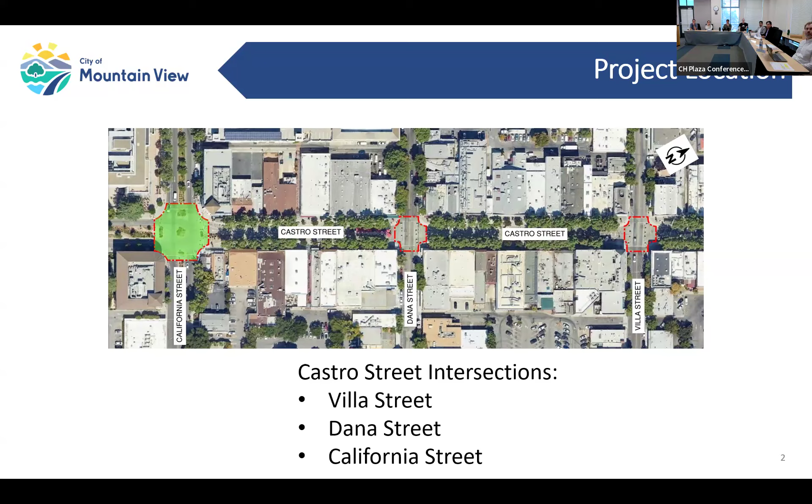So, which Castro intersections are included in this project? The aerial photo shown here illustrates the project location and the three intersections proposed to receive improvements: Villa Street, Dana Street, and California Street. But before we dive into what those improvements are, here's a little project background.

In 2020, as a result of the COVID-19 pandemic, Castro Street between Evelyn Avenue and California Street was closed to vehicular traffic to allow outdoor dining to support local businesses. In 2022, the mayor approved the formation of a council ad hoc committee to review and provide direction for the design guidelines and implementation plan for an interim pedestrian mall along Castro Street.

Later that year, the City Council introduced and adopted an ordinance for establishing a pedestrian mall on Castro Street. In 2023, the ad hoc committee recommended that council approve a modified signal control at the Villa and Dana Street intersections. Council also approved the ad hoc committee's recommendation for a single central pedestrian crossing. And finally, last year, City Council authorized a professional services agreement with Kimley Horn for design services and construction support.

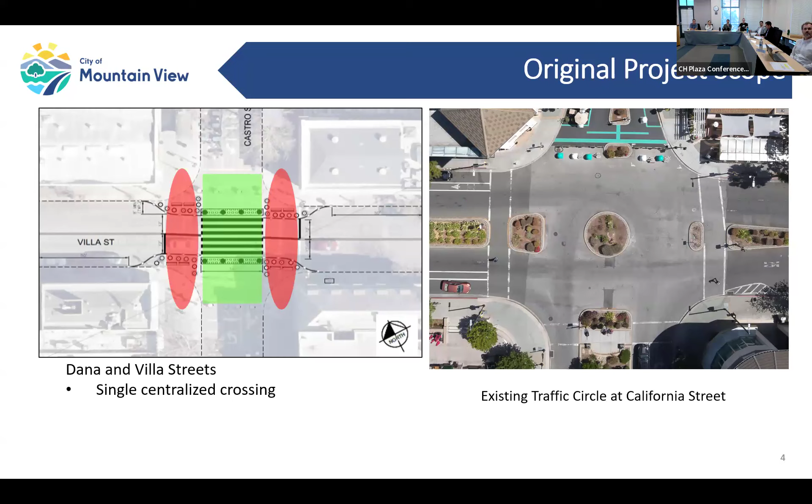At this council meeting, a design concept for Villa and Dana Streets was presented to council and is shown here on the left side. This design includes removing the two north-south crossings and replacing them with a single central crossing in the middle of Castro Street.

Installing new traffic signal equipment, modifying street curbs to shorten the pedestrian crossing distance, and installing new bollards and fencing to guide pedestrians towards the central crossing. On the right side is an aerial of California Street where we are planning to convert the existing traffic circle into a modern roundabout.

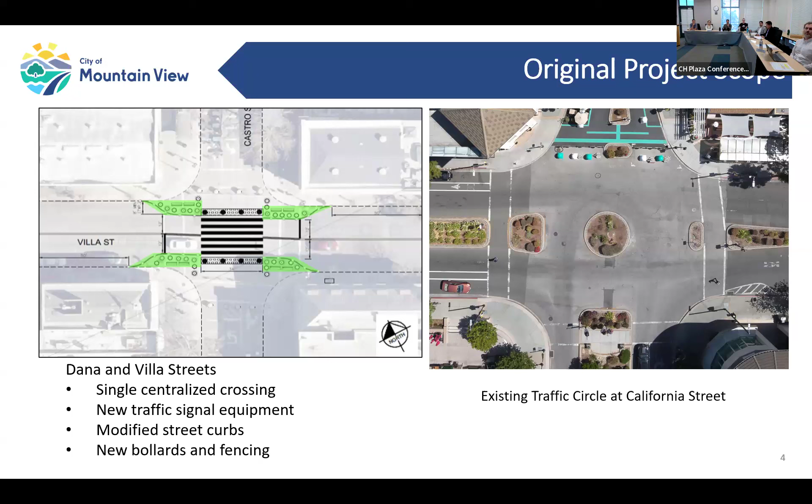Due to limitations in funding and to not delay construction of improvements at Villa and Dana Streets, the project will be constructed in two phases. Phase 1 will include the design and bid package for the Villa and Dana Street intersections. Phase 2, which will follow Phase 1, will include the design and bid package of the California Street intersection. At the moment, only the phase one concept is being developed.

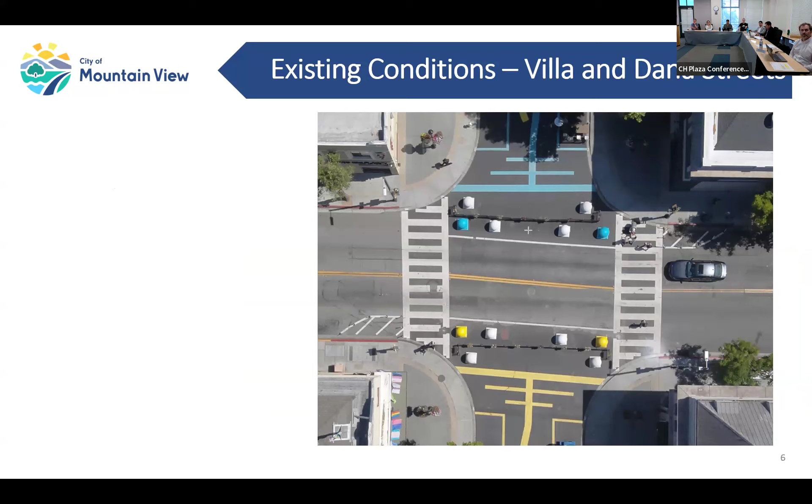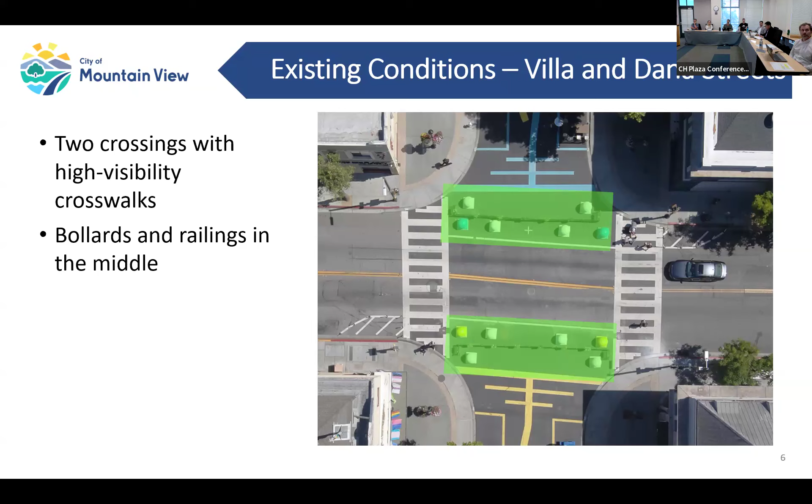This aerial shows the existing conditions at Villa Street, which are similar to conditions on Dana Street. We currently have two crossings which do not allow pedestrians to continue along the center of the street, bollards and railings, and outdated traffic signal equipment that require replacement to accommodate a center crossing.

This next slide shows the proposed improvements at Villa Street, which also applies to Dana Street. The proposed design will include the following elements: pedestrian crossings that align with the existing sidewalks along Castro Street, a central street crossing that includes a 21-foot wide opening that lines up with the recently installed ribbons along the pedestrian walkway.

Removable bollards to provide access to emergency vehicles, reusing the existing colorful round bollards, bulb outs to shorten pedestrian crossing distances. Existing decorative fencing will also be reused to provide a consistent pedestrian mall treatment. New traffic signals and pedestrian push buttons. New uniform thermoplastic crosswalk treatment that extends the entire width of the street, and refreshed striping.

So here are our next steps. We will present the design and BPAC's recommendation to CTC later this year. We anticipate phase one's design to be completed by summer 2026. Construction is not yet funded, but we expect it to be funded by the time design is completed to allow construction to start in fall 2026. We expect phase two design to begin in 2026 once construction funding for phase one is secured.

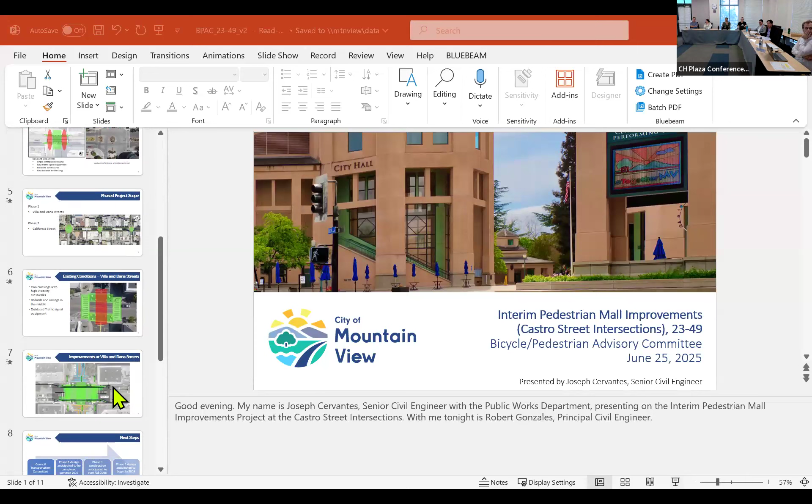I guess the reason I ask is because I vaguely remember hearing something about pedestrian sensors that could detect if somebody's waiting there rather than push buttons, or am I misremembering that? I would defer to our traffic group, so we can get you that answer.

I know that there are certain intersections in the city where we're moving to cameras. I don't know if those cameras are good at detecting either cyclists or pedestrians depending on where they're standing. They're designed to see vehicles in the lanes. So I don't think this intersection is proposed to be equipped with cameras.

We do have push buttons there that have the wave function.

Is it going to prevent any children from misunderstanding that the middle is kind of open for them to cross through with a system like this?

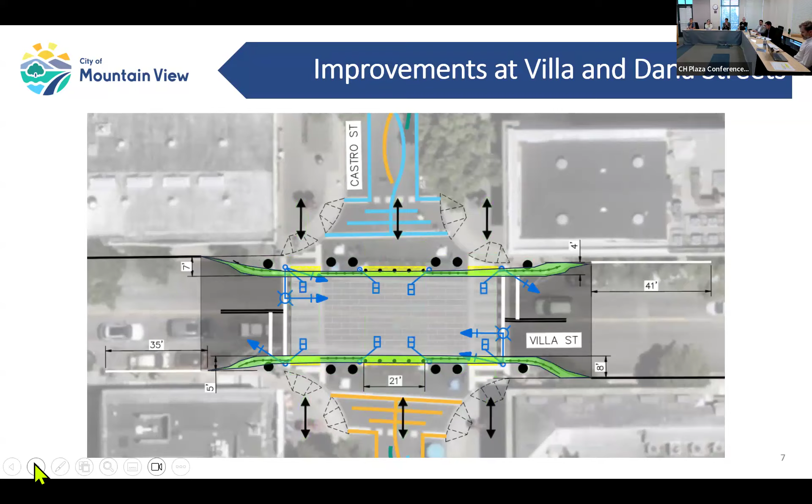That's good to hear. With that, I think we need to figure out, can we go to whatever slide has the action we're being asked to take to approve things or not? I have to ultimately find that. Okay, this one?

My impression of the feedback people have been giving is that broadly speaking we're happy with the layouts, and there are some things we'd like to see. Some comments were potentially a step to do at the same time, but from what I'm hearing from staff, it would be reasonable to revisit once we have the layouts in place—things around signal timing, posted speed limits, and speed humps. I'm not sure if I should include those in a motion or not. Would that be helpful to staff, or should we do a clean motion and have those be separate?

I'm okay either way, so I agree those are the notes I got: reduce speed, signal timing, and the speed humps—consider the speed humps. Staff has all three of those and will present them as concerns or comments back from BPAC to CTC, but you can certainly include it in your recommendation.

Do members of the committee have strong thoughts? Otherwise I'll just make a motion—whatever is easier to convey to CTC, I guess.

I'll move that we recommend the CTC approve the concept intersection layouts for the interim pedestrian mall improvements, with the recommendation that the city revisit or look at signal timing, posted speed limits, and potential installation of speed humps once the project is implemented.

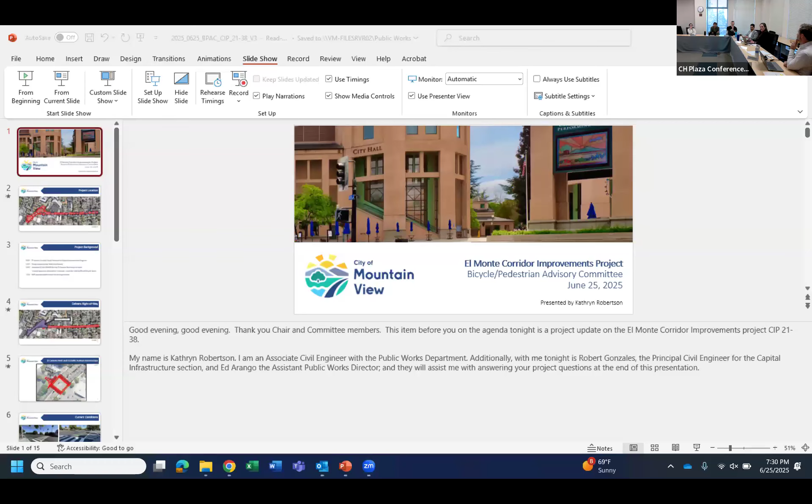Sounds great. All right, ready? Yeah, okay, members ready? All right, good evening. Good evening.

Thank you, Chair and committee members. This item before you on the agenda tonight is a project update on the El Monte Corridor Improvements Project, CIP 2138. My name is Kathryn Robertson, an associate civil engineer with the Public Works Department. Also with me tonight is Robert Gonzales, our principal civil engineer for the capital infrastructure section, and Ed Arango, the assistant public works director, who will assist with answering your questions at the end of this presentation.

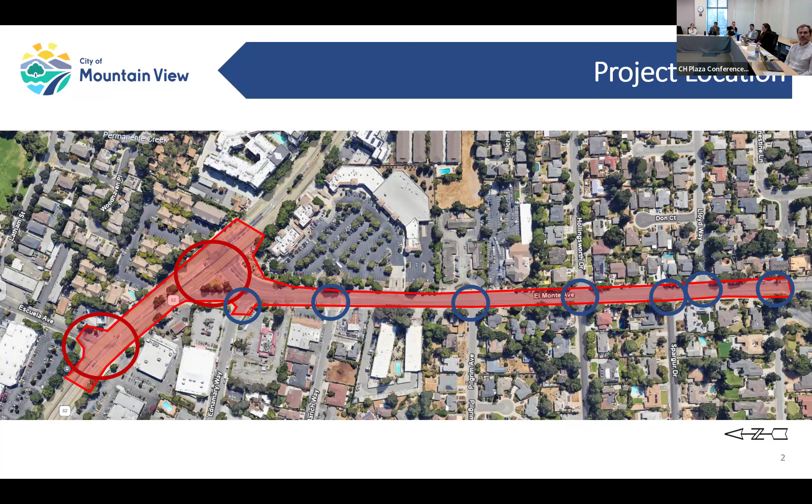This map highlights the project limits and it includes 2 intersections along El Camino Real at Escuela Avenue and El Monte Avenue, and 7 intersections along El Monte Avenue from El Camino Real to the city limits at Springer Road and J Street. El Monte Avenue is a 4-lane street with 2 travel lanes and a bicycle lane in each direction, a posted speed limit of 35 miles per hour, and an average daily traffic volume of approximately 14,000 vehicles per day.

A little background on how we got here today. As part of the fiscal year 2018-2019 capital improvement program, Council approved the El Monte Corridor Study Project to evaluate improvements to increase safety along the corridor. The study was conducted by Mott MacDonald and included several public meetings and outreach efforts for the project, as well as a public online survey in 2022. In 2023, the project was awarded a One Bay Area Grant 3, or OBAG 3, grant for $2.4 million for the scope of work occurring along El Camino Real.

Additionally, in June of 2023, Council approved the feasibility study's Alternative 3 concept, which was a road diet from 4 lanes to 3 lanes with buffered bike lanes as a preferred alternative for El Monte Avenue. In May 2024, Council awarded BKF a professional service agreement to complete the data collection, project design, grant support to prepare the construction bid documents, as well as bidding and construction support, which leads us to today, where we have further developed the concepts of the preliminary design and begun our coordination efforts with Caltrans.

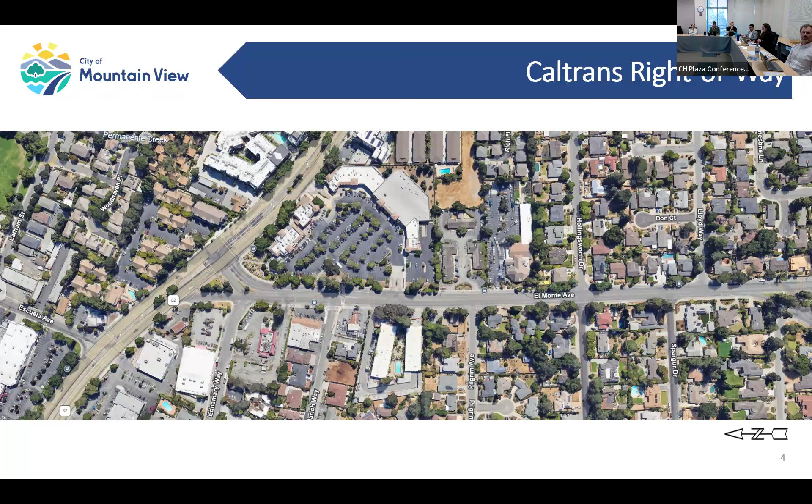Now, before we get started into the design details, I want to highlight the project map again. I want to remind everyone that El Camino Real, also called State 82, is owned and maintained by Caltrans. So the red outline shows the total project location, and now the blue overlay shows where Caltrans right-of-way overlaps with the project. This is of significance because it means the project requires Caltrans design review and permitting to do any improvements within their right-of-way. The OBAG 3 funding is specifically for work within the Caltrans right-of-way.

The city is fully funding the remaining improvements along the El Monte corridor. Previously, it was 2 separate projects, but staff intends to deliver these 2 projects together. Staff have also started the coordination process with Caltrans to obtain approval for our proposed improvements. But staff wants BPAC to be aware that this approval process does complicate and lengthen the duration of project design.

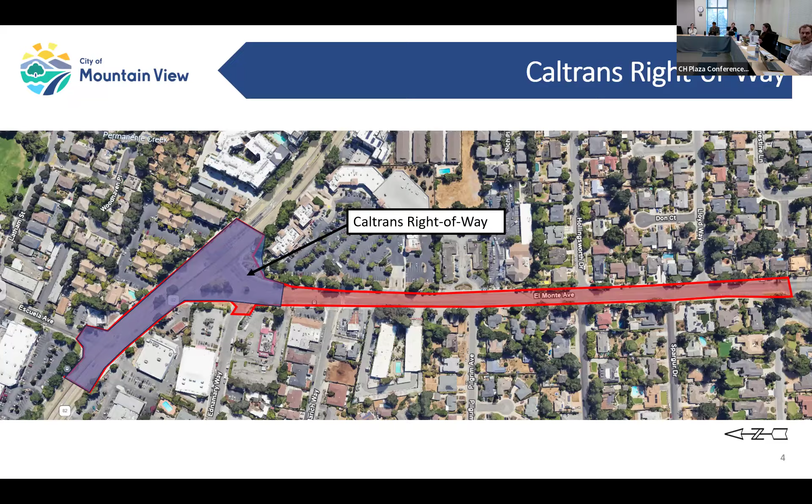The design for the Escuela Avenue intersection with El Camino Real improvements implements the feasibility study's recommendations of high visibility crosswalks, green bike lane striping at conflict areas, and protected intersection treatments where feasible, with the removal of the right turn only lane from Escuela onto El Camino Real, with the installation of curb ramp extensions, which are also known as bulb outs.

The intersection will also receive traffic signal upgrades, which include converting the existing configuration to an 8-phase traffic signal system. The new phasing creates protected left turn movements in all directions, allowing left turns to be made only on a green signal arrow, with no pedestrian or vehicular movement conflicting with that left turn.

The design for the intersection of El Monte Avenue also implements the feasibility study's recommendations, which include high visibility crosswalks, green bike lane striping at conflict areas, maintaining 2 left turn lanes from westbound El Camino Real to southbound El Monte Avenue, and the removal of the right turn slip lane from El Camino Real onto El Monte Avenue.

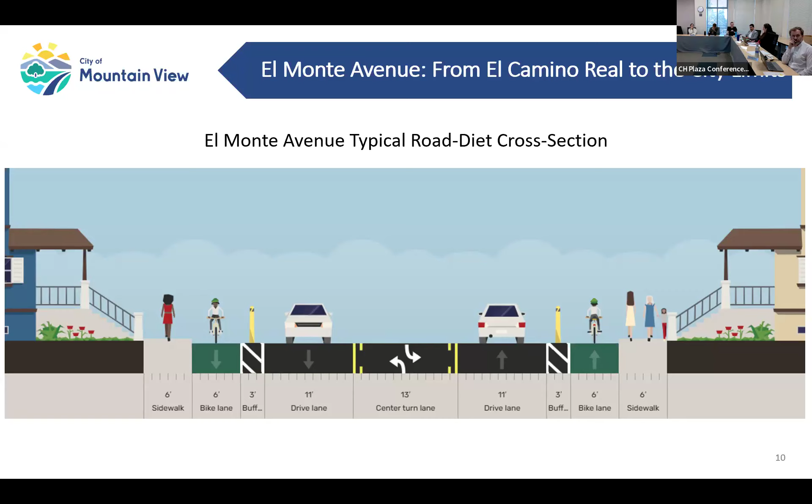This image shows a typical cross-section for the road diet along El Monte from El Camino Real to the city limits at J Street. In this image, a vertical delineator element is shown in the bicycle buffer lane as a placeholder. Please note that the city is looking into lane separators like the quick curb, lane barriers, or more typical flex posts. Staff are hoping to obtain initial feedback from our pilot project on California Street, which is currently being constructed and will test out various styles of vertical delineators before we make a final style decision.

So what are our next steps? Staff will be bringing the design to the Council Transportation Committee, CTC, where staff will share BPAC's feedback. Final design of the project is expected to be completed in summer 2026, when it will be submitted to Caltrans for both grant funding review and permitting, due to the El Camino Real improvements being within their right-of-way. Construction is anticipated to start in spring 2027 to meet the federal grant deadline. That wraps up the presentation, and I'll leave up the recommendation for BPAC's consideration. Thank you, Chair and committee members.

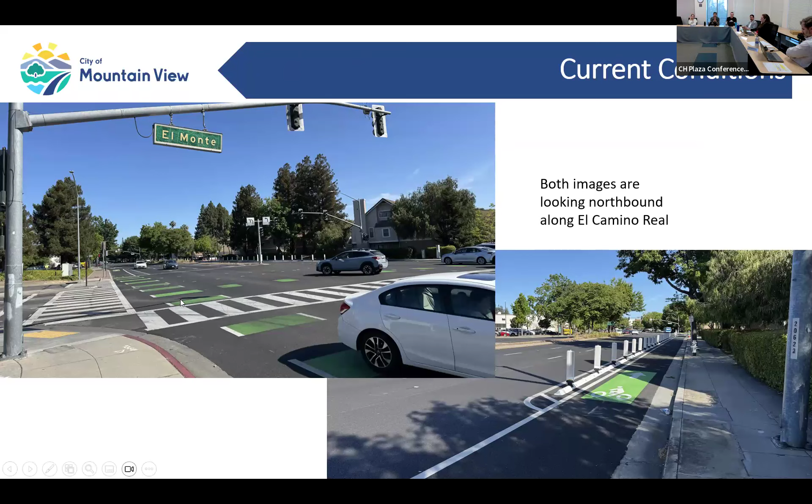But that is the current configuration. So how it is today would probably be very similar. You only turn right via the slip lane right now. Oh, there is a separate right turn? I believe so. Right now, the bike lane, if you go out, you can see the new green striping through the intersection. That's the one you're talking about, correct? I'm talking from El Camino onto El Monte.

Oh, okay, you're talking about this right turn. Yeah, I don't have the signal timing set up yet. Yeah, let me make a comment in a moment, but I was asking if there was a plan there yet.

And so then, on the El Camino Escuela intersection, oh, so we would be adjusting the curbs on both of the corners with Escuela, is that correct? Correct, we're looking to do bulb outs there on both sides.

And then this current right turn only lane, you see how that's removed and now it's a right and through. And now we have a left only lane, versus right now I believe it's a left and through. So that's what the 8-phase signal does, the protection. So now, because it's a left only, it will have its own green arrow.

Yes, and the right turning traffic from El Camino onto Escuela will be merging with the bike lane? Correct, and it becomes a shared row, yes.

And so the reason for those corners between Escuela and El Camino, the reason to not be having more protected bicycle lanes and stopping points, is because of right-of-way width limitations, or because we're readjusting the curbs there anyways? I don't have a good feeling for what would be feasible.

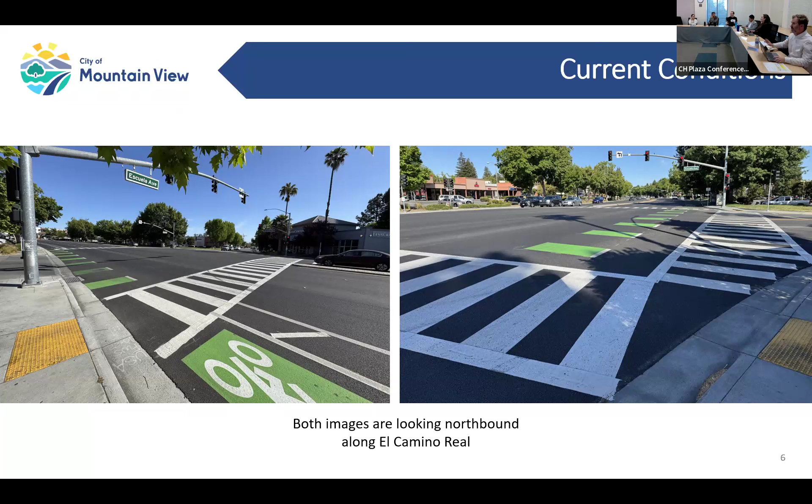My name is Kevin Liu, resident of Mountain View, Higdon Avenue near Rengstorff Park. I really like this change. A couple things I want to address: one, the slipway removal, I really like - it just really feels like it was put in place to try to increase traffic flow, and as a result traffic flows very quickly through it.

I live up along Escuela near Higdon, near Rengstorff Park. So I come to the strip mall sometimes when I'm too lazy to cook and want to get some Panda Express or Chipotle. I do frequent this quite a bit.

I do want to give the room a sense of the people who use this particular street, the pedestrians. Mostly it's a very diverse group, a lot of families, working people, and elderly people of limited mobility. As they're ambling slowly along the slipway towards this unprotected crossing, sometimes you'll have Jeeps and Hummers trying to take that turn aggressively. Sometimes you have the most courteous drivers in the world who will wait for the pedestrian to cross. So it's great that we're removing it and making sure pedestrians do not face that danger when it's completely unnecessary to roll the dice there.

I do share member Kuzmal's concern about the southern corner of the intersection, where the bike lane seems to have two conflict zones: one with vehicles trying to get onto El Monte's right turn lane, and another when they actually pull out onto El Camino. If a cyclist were to try to turn right there, they would have two conflict spots with vehicles in their effort to turn right.

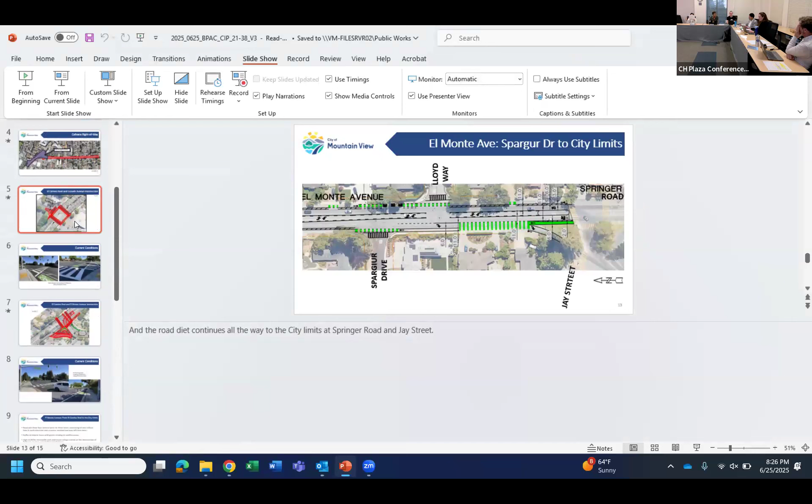It is a parking lot phase there too, as well as that—right, but it's straight or left and then a right. And we are moving directly away from that configuration on the southbound direction, but keeping it as is on northbound. Seems like it would have the same problems, and having a protected left there would be good.

I don't know how much we've thought about the phasing. Yeah, we would look into the phasing. Because if it's good in one direction, it seems like it would be good in the other direction. This is an intersection that gets a lot of pedestrian traffic. Yes, so because this is preliminary, we're not showing any striping changes or phasing changes from the parking lot. That would be something we'd have to talk to the property owner about. I guess that's not in Caltrans right of way, so you're focusing on the Caltrans stuff first.

Or am I assuming too much? So I think the improvements you see here are consistent with the study that we did, and it's also consistent with Caltrans design manual. But we haven't taken the step of reaching out to any property owners yet, so that signaling from the Walgreens may change, but we haven't shown any striping changes yet.

Okay, and for my personal comments, it's real good, it's definitely a huge improvement. It is just frustrating when I look at El Monte and El Camino on the southeast side, that corner that we're not digging into. And you're thinking about all those conflicts with the right turn and how that space is there. It would be so tempting to use it to create very similar safety improvements.

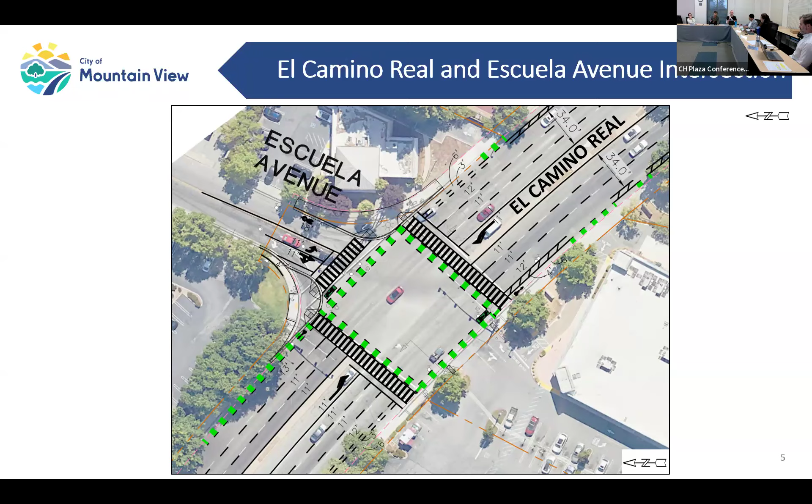So that bleeds into the broader comments I'd make, which is that I'm somewhat concerned about the pedestrian crossings of El Monte. I'm actually more worried about the one at Marich Way, because that goes between a lot of apartment buildings and a large complex of retail businesses. I don't know that a stop sign is appropriate for that location.

I generally don't like stop signs when there's more than two lanes of traffic in each direction. But it does seem like making sure we're doing as best as we reasonably can within the budget would be valuable. I don't know if it's reasonable to try to turn that into a slightly raised crossing. I think that would probably not be appropriate for a 35-mile-an-hour road, but if El Monte is 25 miles an hour, that may be more reasonable and might make that crossing significantly safer. I don't know if it's particularly feasible, but that's on my mind.

That would also be on my mind for the Hollingsworth crossings, because that would help slow down traffic at those intersections, make it safer for pedestrians, and make it easier for people turning left from Hollingsworth onto El Monte if traffic is slowing down there. I don't know how much of a cost impact that would have.

The other thing that came to mind was for all the intersections with El Monte, it seems like it could be valuable to look at - well, I'm talking myself out of this as I say it - I was thinking of how we could make sure cars aren't turning really fast from El Monte onto the side streets, across it for pedestrians walking along El Monte through the crosswalks, and for cyclists going down the bike lanes.

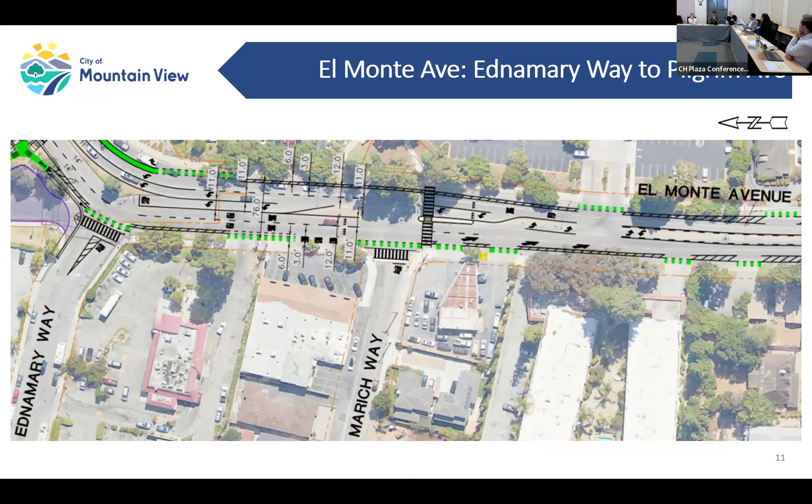Since a bunch of these were improvements I want to see, this all is amazing. As Valerie Fenwick was mentioning, there have been multiple fatalities along this section of corridor, and these improvements should hopefully help with the exact problems we're having. So I think it will definitely be an improvement on the status quo for this particular stretch. I'm always looking for more though.

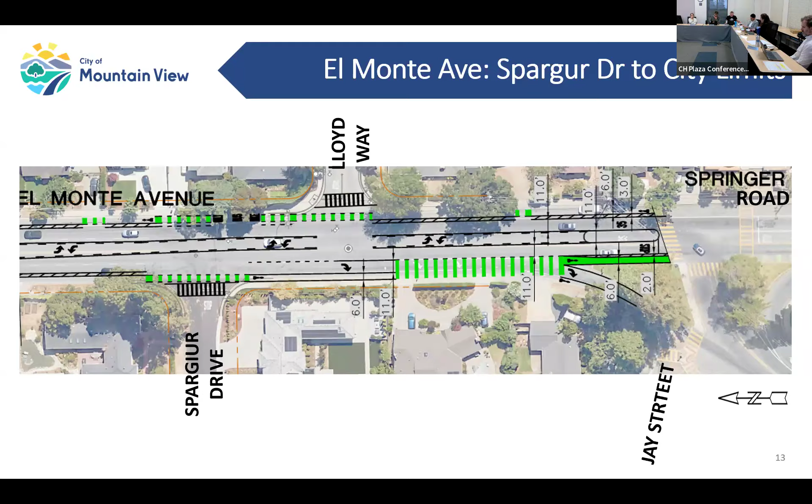In that case, I think we need to work ourselves towards a motion.

Shall I start with what I want and you guys can add on anything else you like? Sure. Okay, then I would like to make a motion that the BPAC

Approve this preliminary design with the recommendation of a protected left turn coming out of the parking lot onto El Camino and Escuela, and ask that we look into the cost of adding protected treatments on the east side of the El Camino and El Monte intersection to mirror those improvements on the west side.

Is that... you guys want to ask to look at protected elements on the corners of this whole intersection? I do want to also.

And to consider, if possible, protected elements on the Escuela Avenue and El Camino north side, and potentially reducing the northbound Escuela lane width to give more space to the bicycle.

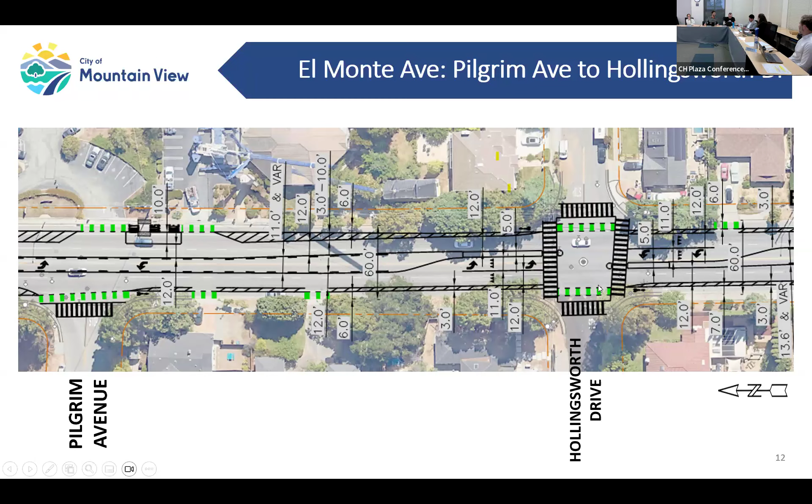All right, we had a motion, I will second it, and asked for... did we want to consider adding, there are discussions about J Street. I don't know that we had a concrete recommendation there.

And I made some comments about pedestrian crossings. The closest I had to a recommendation was to look at whether raised crossings were feasible. And there was discussion of explicitly asking for a speed study once the project is complete, which it sounds like is probably going to happen. I don't know what's the right answer for those, and staff has our comments.

I'm happy to explicitly recommend a speed study post-construction, so we can amend the motion saying BPAC also recommends a speed study to be done post-improvement. Just trying to catch if there are any other comments we made that are concrete enough that I'm comfortable recommending them.

Yeah, I think we had a few other things we brought up that I don't even know if staff will look at, but we don't even know for sure they are the right answer. Staff can evaluate the approach at J Street to see if there's any other treatments we can do to alleviate speed concerns.

Okay. Any other comments on the motion or otherwise?

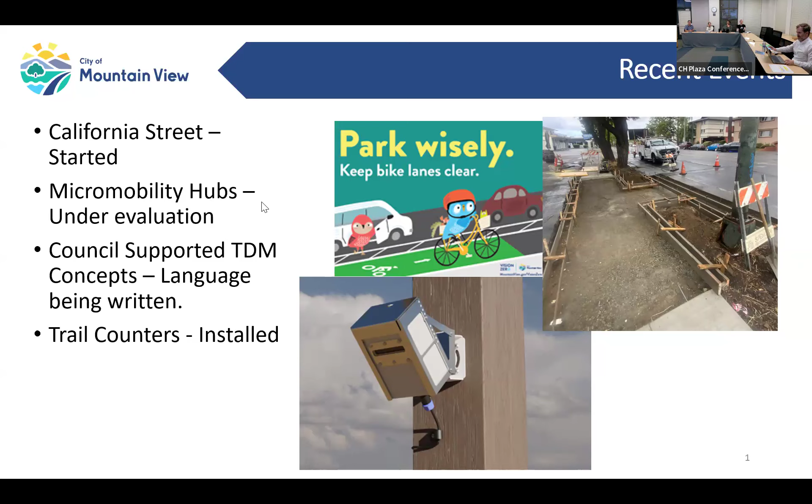Upcoming events: the active transportation plan will be releasing a survey soon to collect information on projects, scored projects. Mobile bike ped counters are in the mail.

As you know, we did a pre-count for the California Street pilot project, and we borrowed counters from Caltrans in order to do that, at no charge from Caltrans—very nice of them to let us have those for many, many months while we were out there counting. We have now bought our own, and they will be arriving in about a month, in advance of the completion of the California Street project, and then we'll do an after study.

The Terra Bella Bikeway feasibility study is still underway, and more will be coming from that as the months roll on. That is the staff update, and I'm happy to answer any clarifying questions.

Does the committee have any clarifying questions on the staff update?

Anything notable in Ask Mountain View, or not able to generate an update for this month? We are not able to generate an update for this month, and that is something we will discuss in the future.

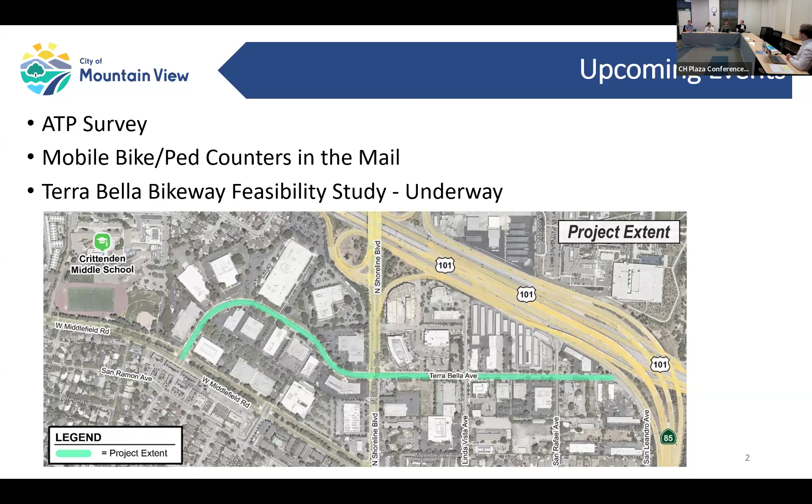Anything else about the staff updates? Okay, then we will move on to 7.2 committee comments. If we have anything, any updates about things not on the agenda, we can, as long as we aren't discussing things that aren't on the agenda.

Now that the council has approved the VTA BPAC appointment, I will be giving updates on the VTA BPAC at future meetings. I was also going to note that at the council meeting yesterday, someone who asserted they were a crossing guard at Rock and Rengstorff for Crittenden Middle School raised concerns about figuring out how to get issues with drivers making illegal maneuvers to the police department. It sounded like someone was going to follow up on that, but I hope that is actually followed up on. So I think that's all I had to mention.